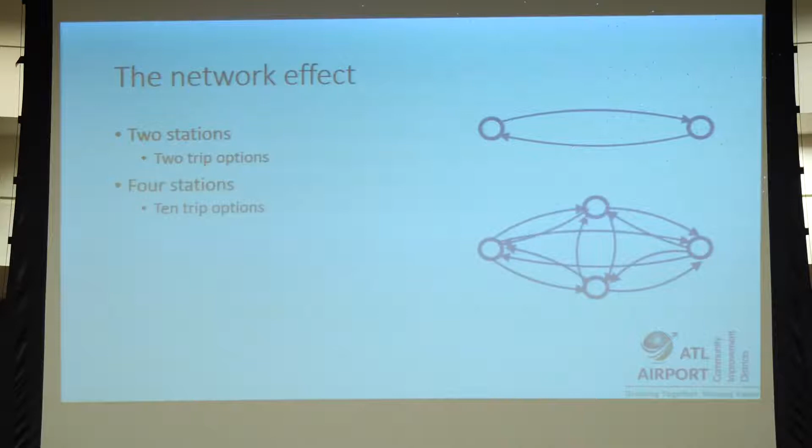So your options go up faster than the number of stations. So the utility of the system, which correlates with the ridership and the revenues, goes up faster than the number of stations goes up. So the rule of thumb is that it increases at roughly the square of the number of stations.

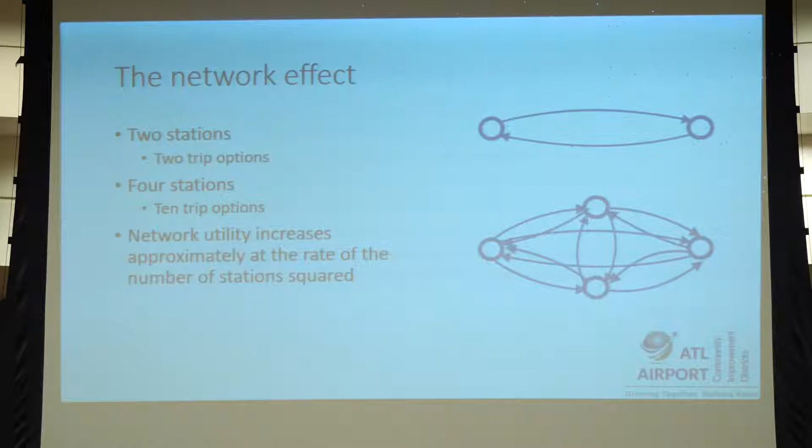So this is what an ATN network with about 100 stations might look like. These stations would be spaced about half a mile apart in any direction. So anybody in between any of those areas is within a quarter mile or less of a station. That's about a 5-minute walk from your home or from your office to get to a station. And then when you get to a station and catch a vehicle, it can get to any other station. No need to transfer.

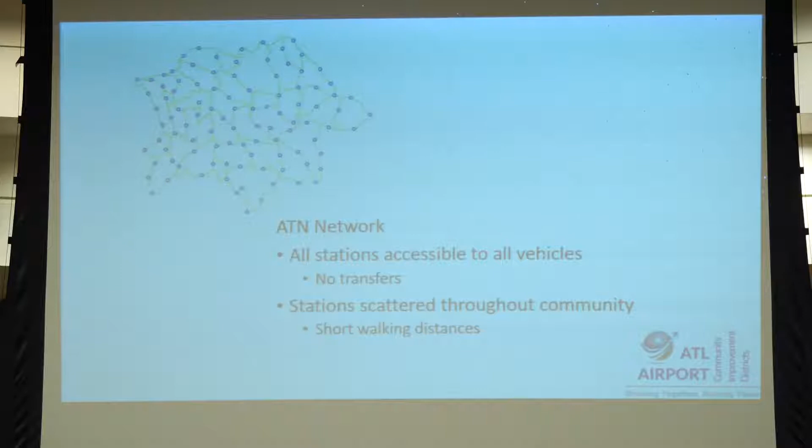So we would have these stations scattered throughout the community, and that would be the service area we would serve. Now, each one of these stations, as I said before, is offline. The green is the through line, and the blue is the station guideway. So if that's not your station, you go on by. So there are very few or no intermediate stops.

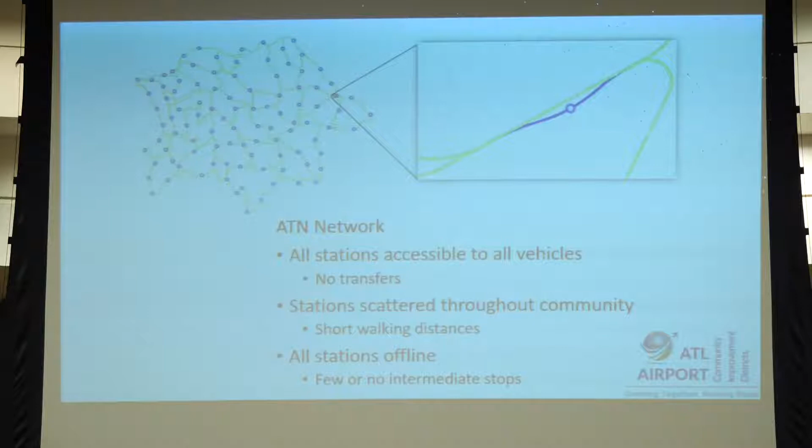So this is why the network effect works well with ATN. It doesn't work so well with light rail. Here's a 100-station light rail system in Denver, where I'm from. Now, each of those stations is about a mile apart along the line, but the lines themselves are many miles apart. So in fact, while this looks like it's got a bigger service area, it really doesn't. The service area around the stations is the same because you have 100 stations, but in this case, you have about 4 times as much rail track as you do with ATN to serve the same service area.

And the network effect doesn't work for light rail because when you add a station, you add a stop. Every train stops at every one of these stations. So you can imagine how slow the light rail is. It has a maximum speed of 55 miles an hour, and their average speed is around 20.

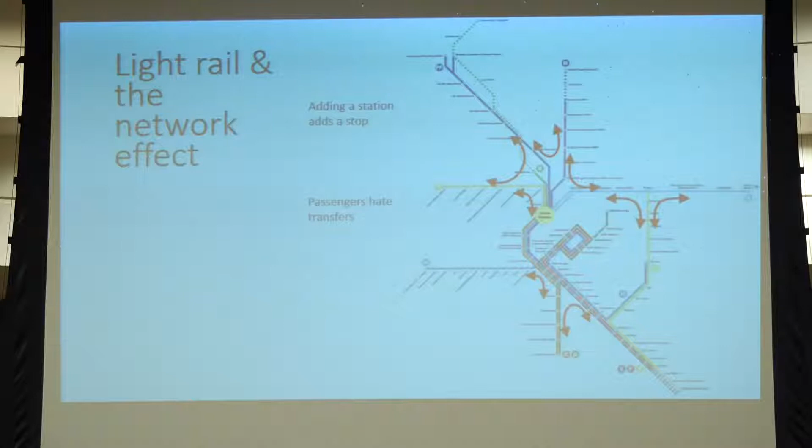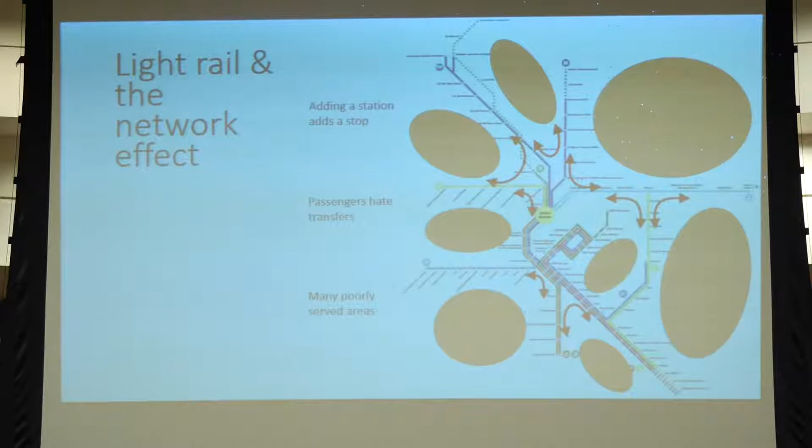Also, when you add more stations, you add more lines because they're not interconnected. So now you have transfers. Passengers hate transfers. And then finally, this is not really the service area because large parts of these areas are just not served at all. So the network effect doesn't work for light rail or for bus rapid transit or for bus because of these types of reasons.

Now, when I'm saying break even and make a profit, I'm not just talking about the operating costs, I'm talking about the capital plus the operating costs. So if a system like this gets big enough, or it connects the right points to other points, it can make a profit and pay for itself right out of the box.

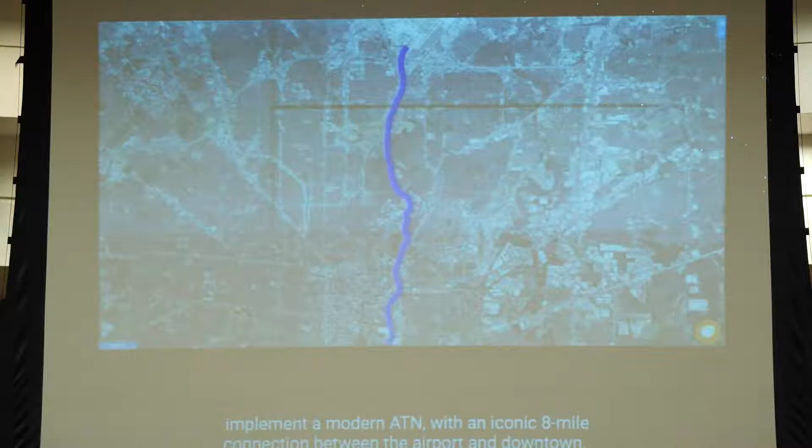Planning a connection between the airport and downtown. The proposed route includes 6 stations serving the airport terminal, the economy parking lot, Quarry Market, the zoo, university area, the Pearl District, and the convention center.

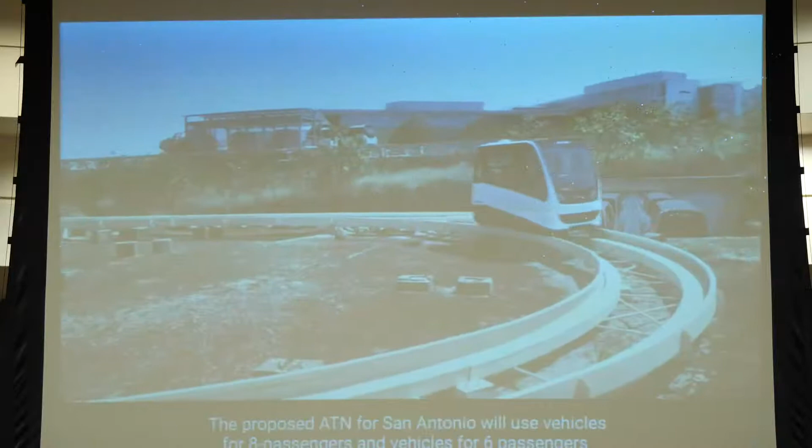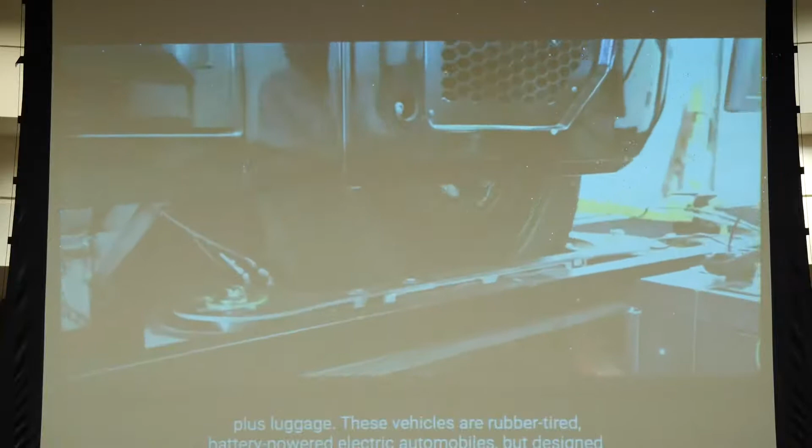The proposed ATN will use vehicles for 8 passengers and vehicles for 6 passengers, plus luggage. These vehicles are rubber-tired, battery-powered electric automobiles, but are designed specifically for mass transit. The vehicles can be automatically coupled to form trains of varying sizes.

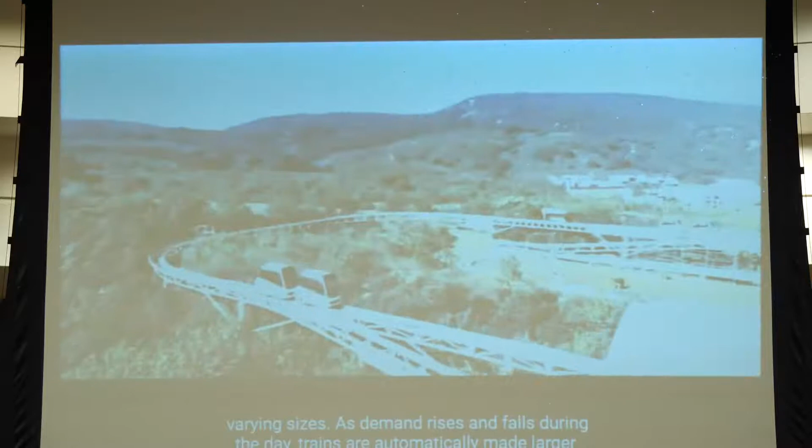As demand rises and falls during the day, trains are automatically made larger or smaller to match the demand in real time. The driverless vehicles load and unload quickly, even when passengers have luggage or use a wheelchair. All passengers are seated in air-conditioned comfort with a healthy ceiling-to-floor airflow. Each vehicle has a passenger intercom, information displays, and video surveillance.

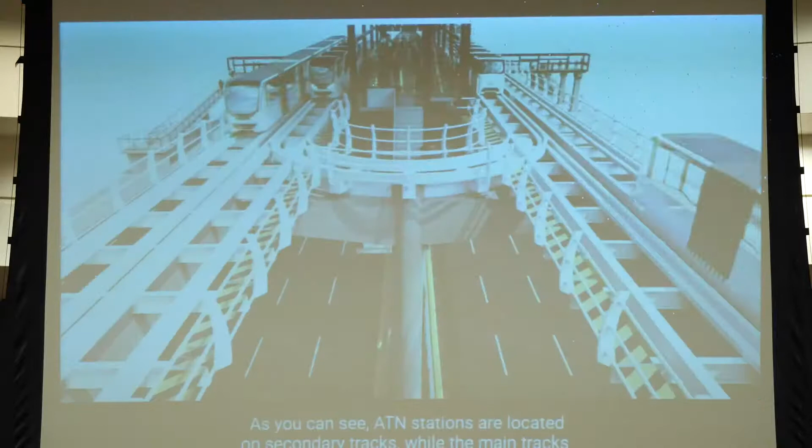ATN stations are located on secondary tracks, while the main tracks bypass the station. This design feature allows trains to only stop at stations where they pick up or drop off passengers. The stations also have space for vehicle U-turns.

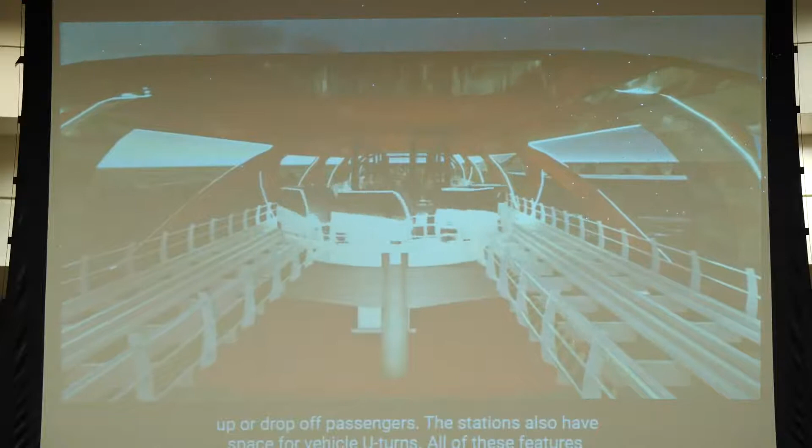All of these features enable a demand-responsive service, meaning first, that vehicles are only used when and where they're needed, saving costs. Second, train routes and schedules automatically get adjusted to real-time demand throughout the day. Third, different types of services can be offered, ranging from a non-stop express service to an inexpensive bus-like service that stops at every station. The different levels of service are enabled by Modutram's state-of-the-art train control and passenger management software

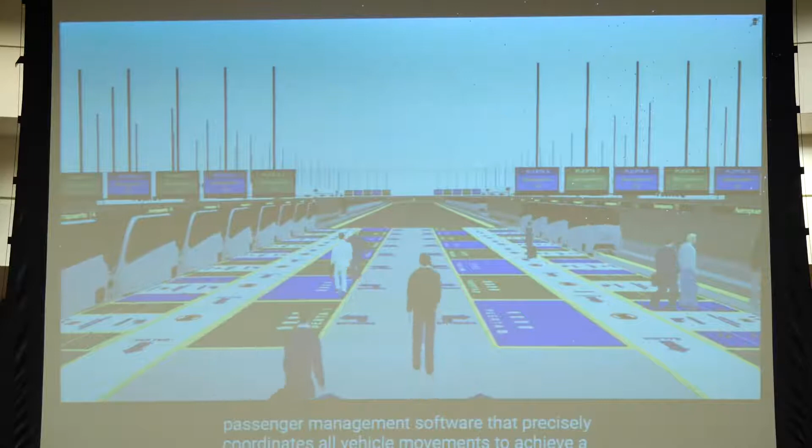That precisely coordinates all vehicle movements to achieve a smooth, constant flow of passengers and trains. The train control system also ensures safety, and it's certified to the highest standards.

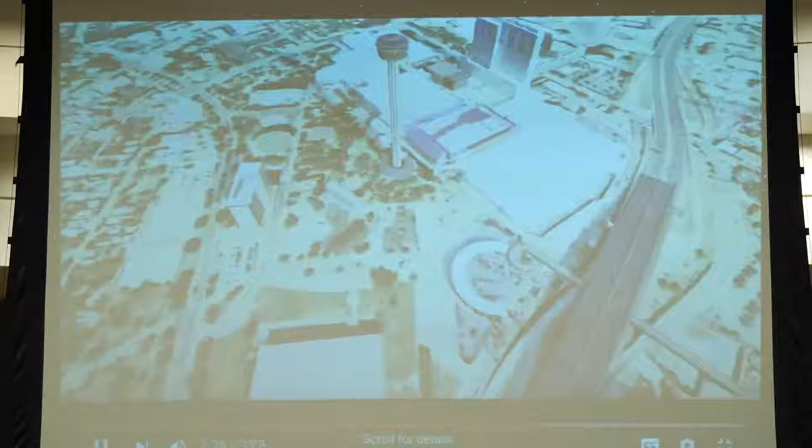What makes this particular ATN solution unique and so compelling for San Antonio is that it will serve both visitors and residents. That is, it's not just an automated high-speed taxi service, but a high-quality rapid transit system with affordable fares for commuters, students, airport staff, concert goers, you name it.

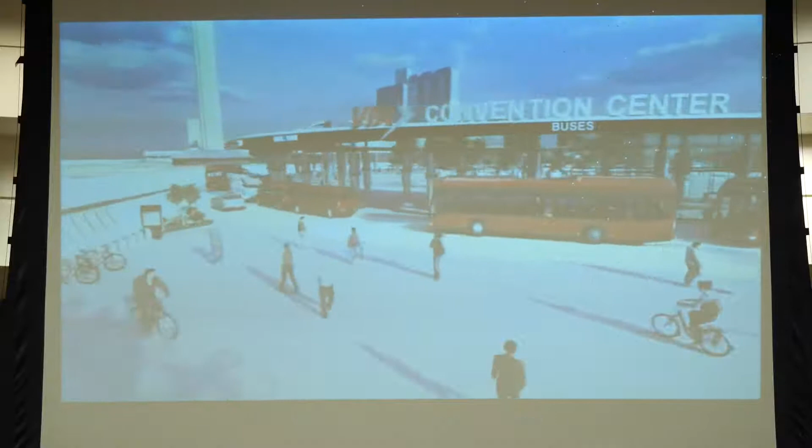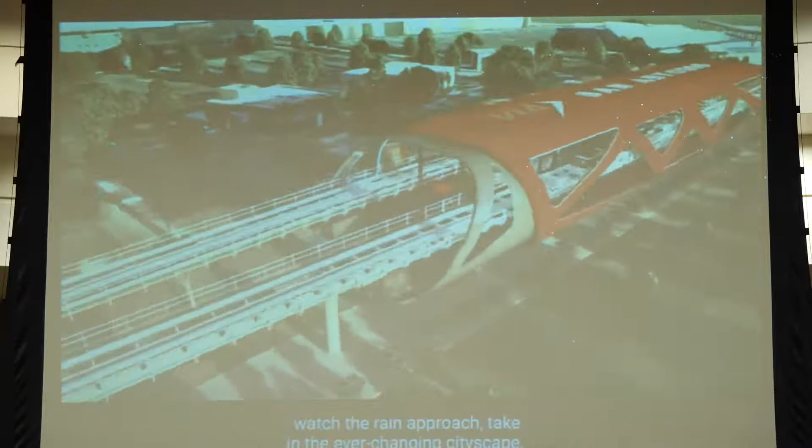In addition, this solution will integrate with existing and future VIA transit services to extend and improve the city's overall transit network, and with hotel vans and autonomous shuttles to provide last 500-yard connections. Finally, the elevated portions of this iconic ride will showcase San Antonio's beauty, letting passengers admire the sunrise and sunset, watch the rain approach, take in ever-changing cityscape, and just live San Antonio to its fullest.

San Antonio ATN by Bexar Automated Transport.

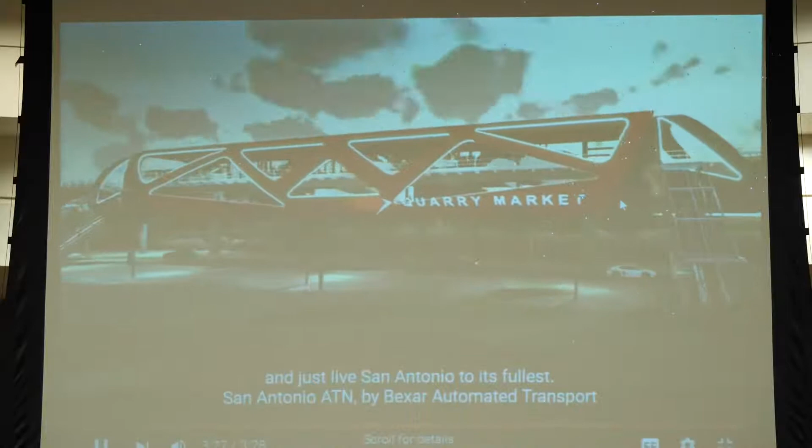Mr. Clay, that's the system that you'll be visiting in Mexico. Okay. It looked like it. Yeah. I went to their website and looked around in advance.

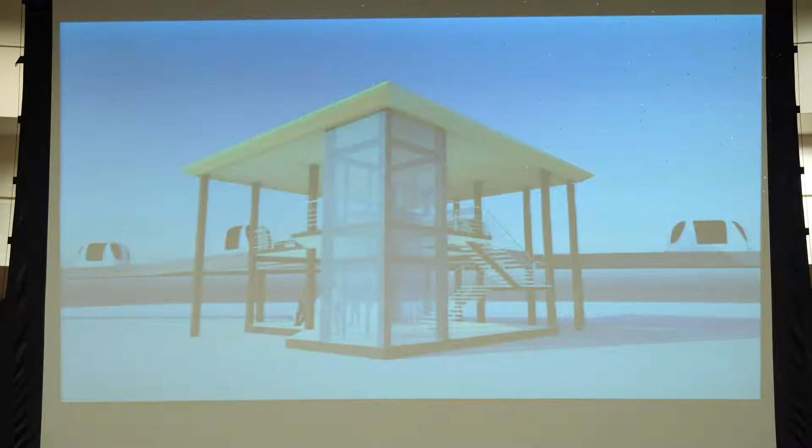So stations can be small. This is unlike light rail, where the station has to be as long as the longest train it's ever going to see. Here we can make stations small or large, depending on demand.

A small station has a very small footprint, as you can see. The only thing on the ground is the bottom of the stairs and the elevator and the columns. So it can often fit in behind the sidewalk.

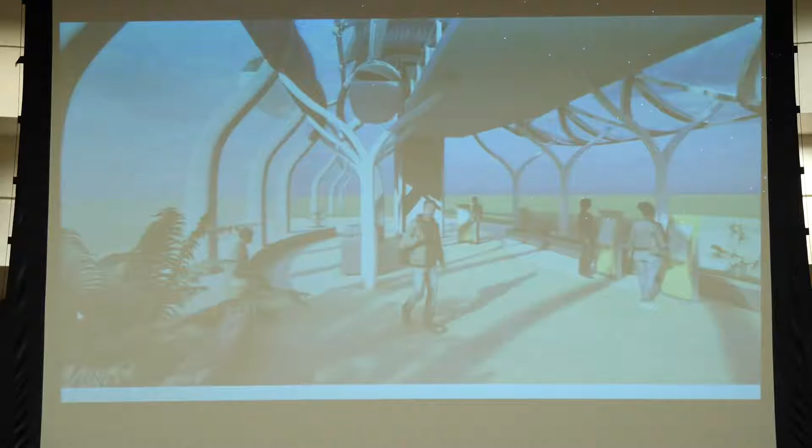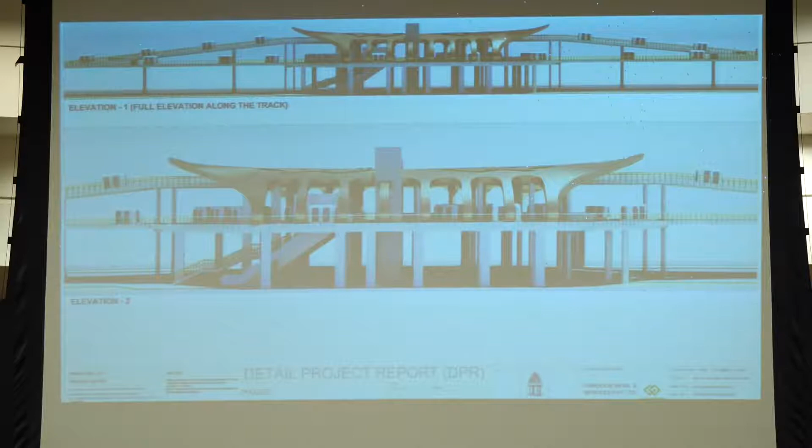Here's the level below the platform, and here's the platform level on a small station. This is a large station, probably larger than you would ever see here. You can see the bypassing guideway actually goes over the station. This station has 12 berths and also has room for standby vehicles.

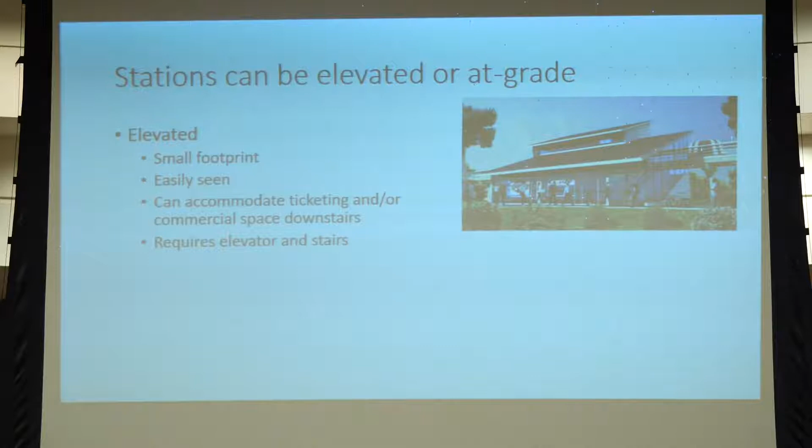Stations can be elevated or at grade. Elevated stations typically have a smaller footprint, but they can also have commercial space downstairs, which would add to the footprint. They require elevators and stairs, which require more maintenance. At-grade stations take up a bit more space, but they're more easily accessed by passengers and they're simpler.

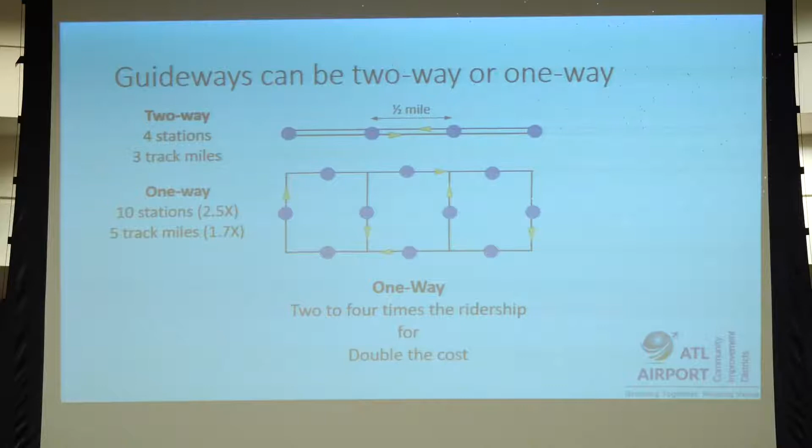Guideways can be two-way or one-way. I think I mentioned before we prefer one-way guideways, and this slide explains that, but I'm not going to go into the detail of that. It's just that you get 2 to 4 times the ridership for double the cost when you go with one-way rather than two-way.

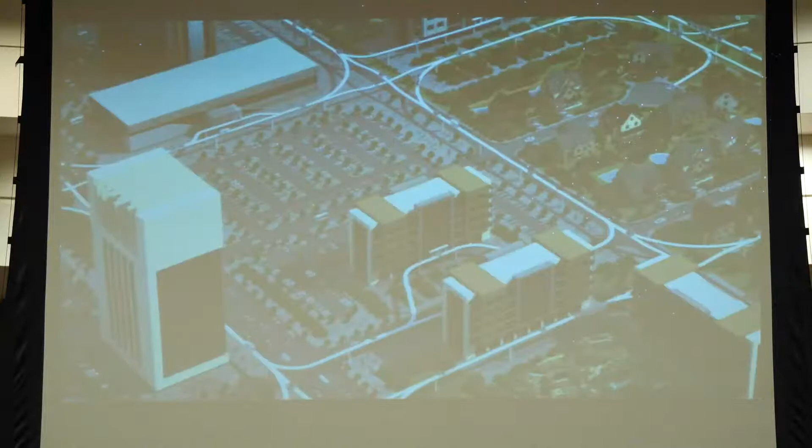This shows how you can retrofit an existing community with ATN. With the elevated guideways fitting behind sidewalks and so on, it's fairly easy to build the system in an existing developed area. An ATN train can serve a legacy train, and the two will support each other, boosting both their riderships. Stations can be attached to buildings, providing access to businesses and jobs.

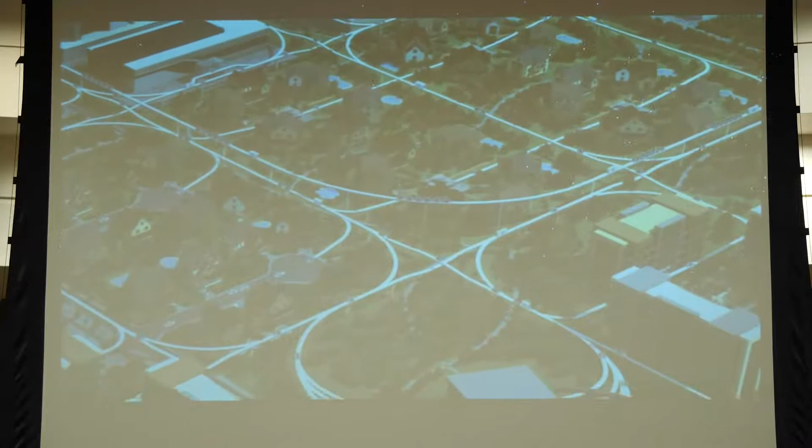As we go to the right here, we're into more of a new development area. As you can see, in a new development, we can avoid a lot of the parking lots and the roads and so on, and have a much nicer environment to live in. And finally, we could connect the ATN system to the Hyperloop so you can get to London in a few hours.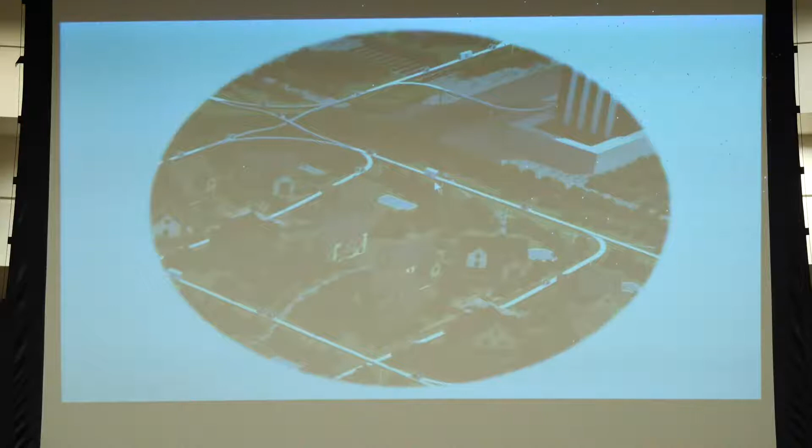Now, you could have a bicycle footpath going through the other side of the houses, and that could be built in such a way that if you absolutely had to get a large vehicle to a house, you could use that for that purpose. So this is a way that potentially we could live in the future, where we're living and working in a park-like setting, yet we're in the middle of a dense city. And at the same time, we have access to high-speed, high-quality transportation for us and our children, our entire families. Imagine what that would be like.

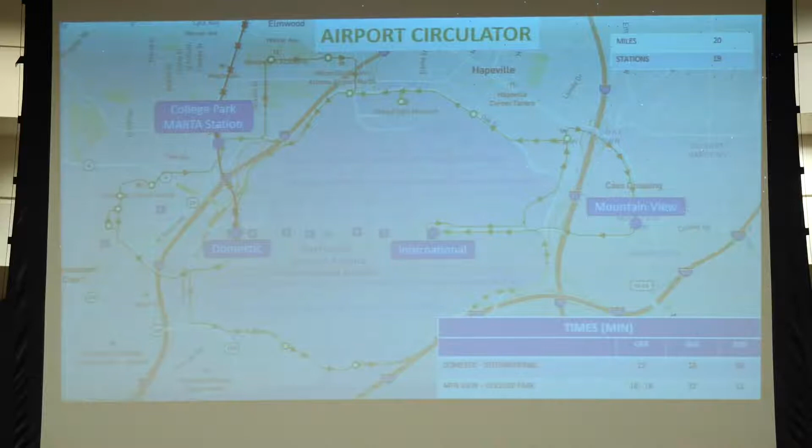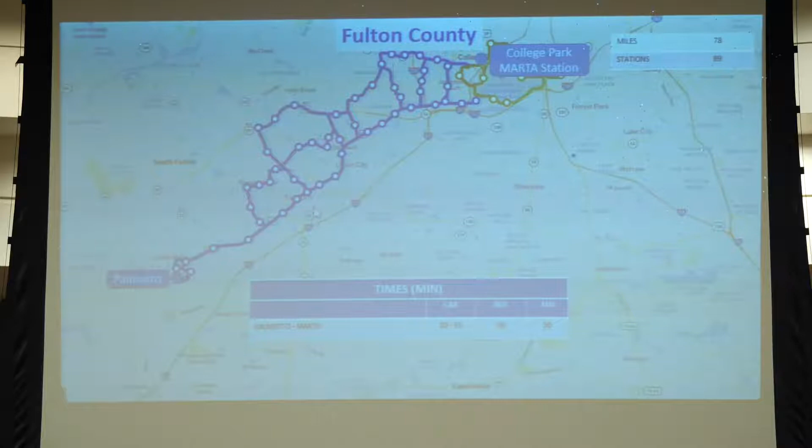So let's think about how we could build a pilot or a demonstration system that's smaller, something we can use to demonstrate the technology, to allow people and elected officials to see and ride, to promote the vision of what's coming or what could come, and to get their feedback.

I think the goals for this kind of system should be, if possible, to try to serve a real purpose rather than just have a demonstration that's out there in the parking lot running around, not really taking anybody anywhere. It would be nice if we could serve a real purpose and possibly even generate some revenue.

It would be nice if it could be in a place where it was publicly accessible, where it was fairly simple to implement and operate, and where it could easily be expanded into the neighboring area to serve an even bigger purpose. So with that in mind, we looked at some different demonstrations, and I don't think any of them is perfect, but they're all different ideas as to what we could do.

And if you want to move forward in this direction, we could help figure out how to do that and which one works best and how to modify them to work even better. But these are some initial ideas.

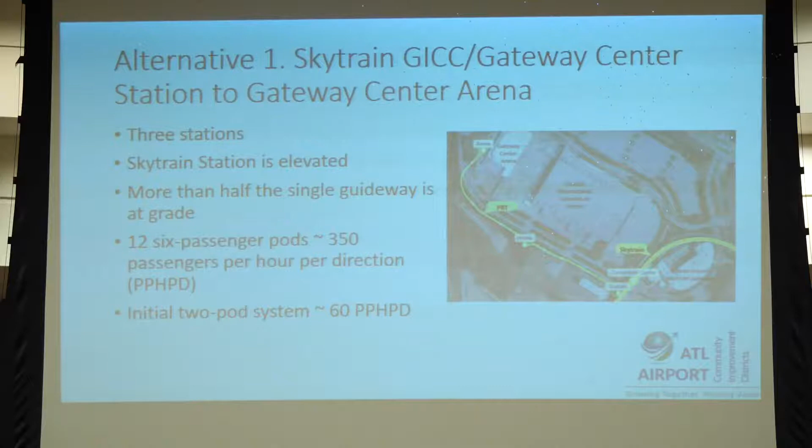it's an option. So let's look at alternative 2. And this is where there's been discussion of a connector bridge going across from the convention center to 6 West. And this is planned as an iconic bridge.

Well, we could replace that bridge with an ATN system, which would take about 2 minutes to wait for, enter, ride, and then leave a pod on the other side. And this has some pros and cons also.

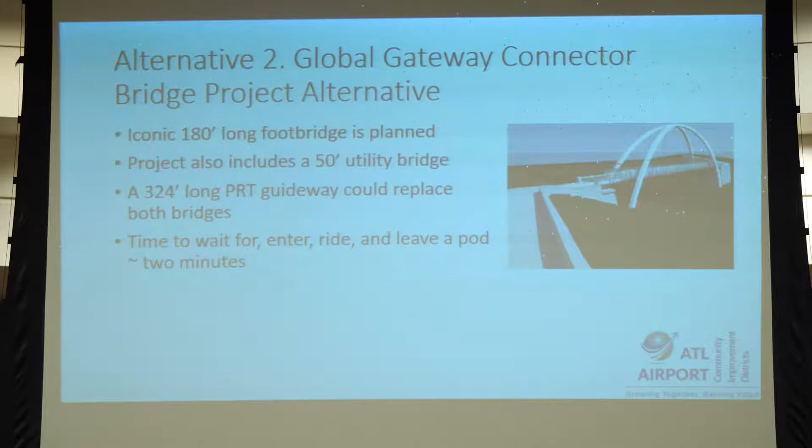It could be 2 stations connected by a double guideway and have 4 pods initially. Now, what we're showing here is that bridge is across this part, but there's a second bridge up here, and we would take the system to replace both bridges.

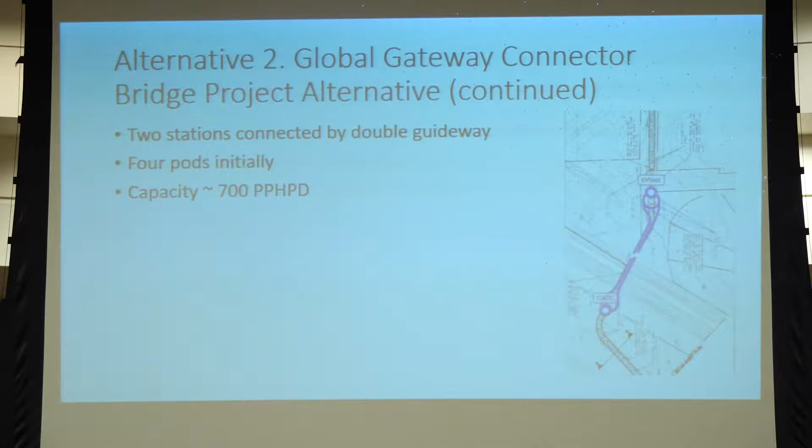The problem with that is we wouldn't necessarily have an iconic bridge, but you could combine the two ideas and make an iconic bridge that supported the ATN system. That would increase the cost somewhat, but my guess is we'd still be substantially below the cost of a pedestrian bridge. Surprisingly, a pedestrian bridge has a higher load than an ATN footbridge, because you have to protect against a crowd of people crowding onto the bridge shoulder to shoulder for the entire width. They would weigh more than twice as much as ATN vehicles bumper to bumper across that bridge. So there's a possibility of saving money on the bridge.

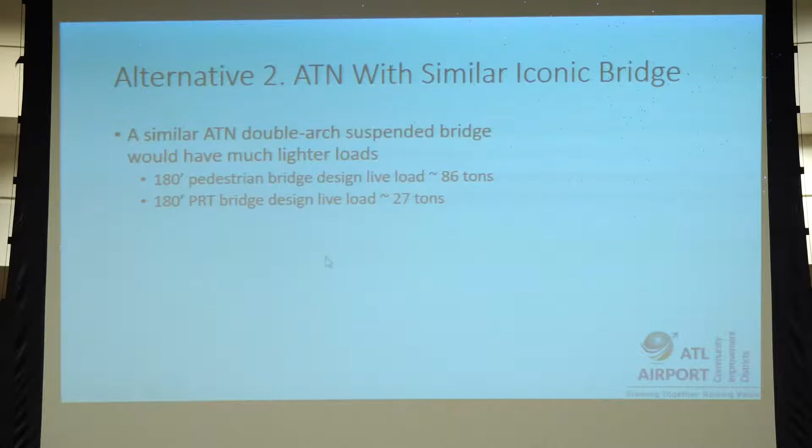But then you've also got issues with everybody who uses that bridge having to cross in the ATN system, so it would have to be running full time whenever you need it. And if you have some event like a foot race along the path, they'd have to stop, get in a vehicle, go across, and then continue the race on the other side—that's going to be a problem. So this may or may not be a viable solution, but it was brought up, we looked into it, and this is what we found.

Now there's an opportunity to expand the first option we showed you to connect directly to the airport without having to change to the Skytrain. So you go to the airport in one direction, and in the other direction to the Delta employee parking lot, replacing the buses that serve that lot. There's some other remote parking you could connect to as well. When you do all these connections, all these facilities are within 5 minutes of the domestic terminal from any station—that's quicker than what it takes from those parking lots today, which is 7 to 12 minutes.

And you replace all those shuttle buses, which are very expensive. So this alternative could potentially pay for itself.

And here's a layout of how it would work. This is the Delta parking lot down here, this is the arena station, this is that hotel station, here's the convention center. We bypass the Skytrain and go directly to the domestic terminal, and we also pick up park-and-ticket and park-and-fly riders over here.

I would be very surprised if this system didn't make money when you compare the cost of building and operating it to the cost of owning and operating buses. And it would have a big advantage in taking a bunch of buses off the roads—we could factor that in too, because buses cause a lot of damage to roads.

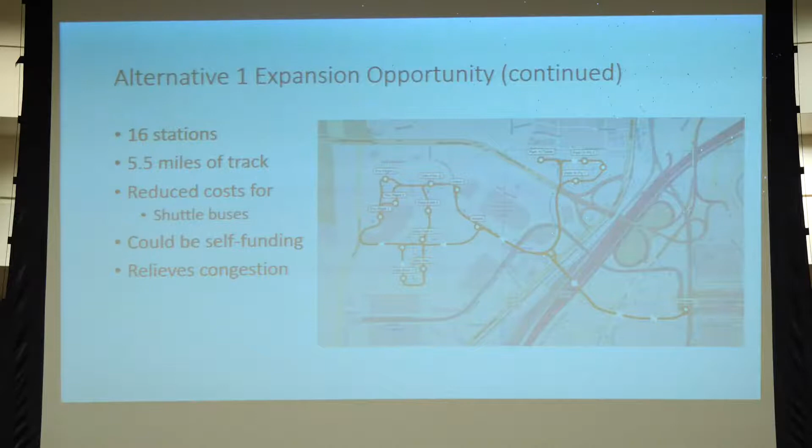So that's one alternative for expanding alternative 1. Alternative 1 and 2 could both be expanded and combined. And...

Here's another way of doing that expansion, where instead of just connecting here to the arena and building the bridge, we build an ATN network that totally replaces that bridge and goes all the way through Six West. We turn Six West into a transit-oriented development, which would boost their property values significantly, and it would connect to the MARTA station right down the road here in College Park. So this is yet another way of doing it.

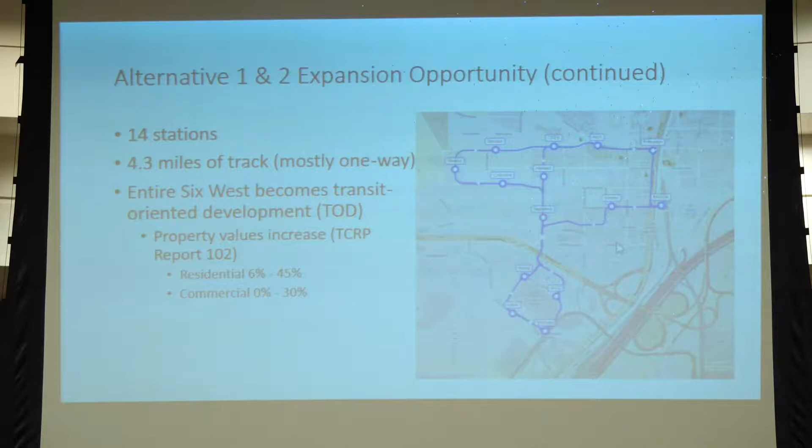And this may or may not pay for itself—it depends on where Six West is in terms of whether they want it, when they want it, whether they'd be prepared to help pay for its development, and so on. So these are some options that we have.

We should think about where we go from here. If we want to do this, I would recommend we form a steering committee that comes up with more local goals and objectives than I've come up with, and then we compare these alternatives with others. I'm sure we could find 2 or 3 others in the area worth looking at. Discuss it with potential partners, see if there are others who want to get involved in helping develop, design, pay for, and consider these alternatives. Then you select an alternative, find the funding, select a supplier, build and operate it, and hopefully in the future expand it.